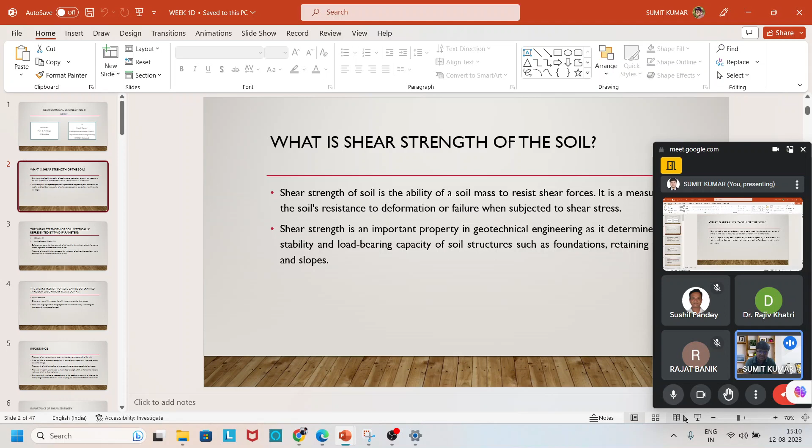Okay, so first of all, we started our discussion from here, in which we studied the shear strength of soil and the basic concepts we understood. Those things are covered there. So first we start from there and then go ahead with broader aspects of the concepts, which will enhance your knowledge base in this topic.

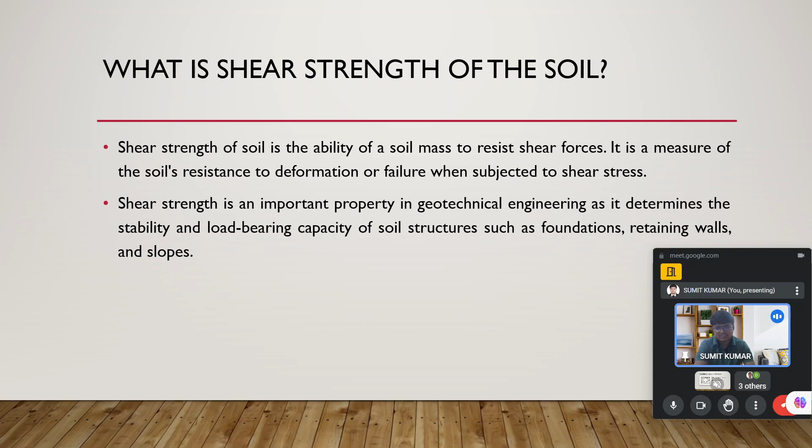First of all, we will define this. We have studied what is the shear strength of soil, and how shear strength is so important in geotechnical engineering, where we implement basic soil mechanics concepts into broader practical aspects. Most of these basics were studied during our geotechnical engineering one course, or soil mechanics one. So this is the second part of that subject, dealing with application of those concepts in practical life.

First of all, in shear, whenever we talk about shear strength, we start with the value of cohesion and the value of angle of internal friction. Cohesion is related to cohesive soil, while angle of internal friction is related to cohesionless soil like sandy soil, gravelly soil, and those have their own aspects. We are going very quick, not taking anything in detail. If any questions are there, you can pin a message in the text box.

Afterwards, we have read the triaxial test and direct shear test, covered in detail in the last lecture. In the coming week, we will again discuss the triaxial test and solve some problems, which will help with practical implementation. There are very good problems solved on this topic, and if you are a professional, these test results will help you find the shear strength parameters. If you are preparing for competitive exams, this is a favorite question topic.

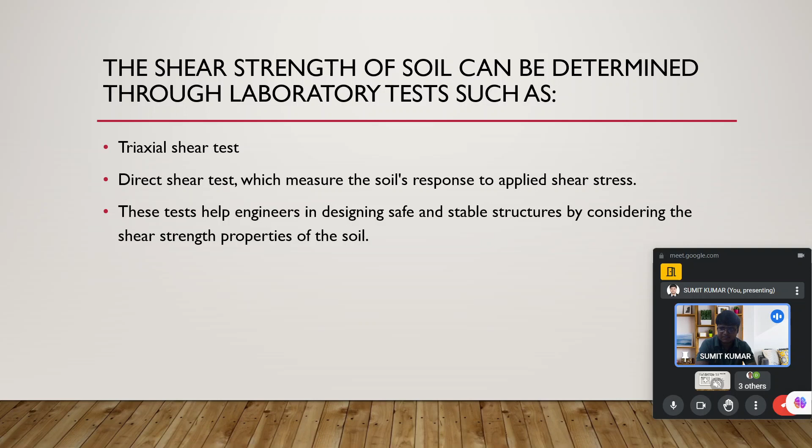Moving ahead, we have studied the importance of shear strength. It is used at every place in geotechnical engineering. In any geotechnical structure, first we understand what is shear strength and how it varies, and at what value the soil fails in shear criteria. In geotechnical engineering and soil mechanics, our focus is on the value of shear strength, not compressive strength or tensile strength as discussed in RCC, steel, or strength of materials classes.

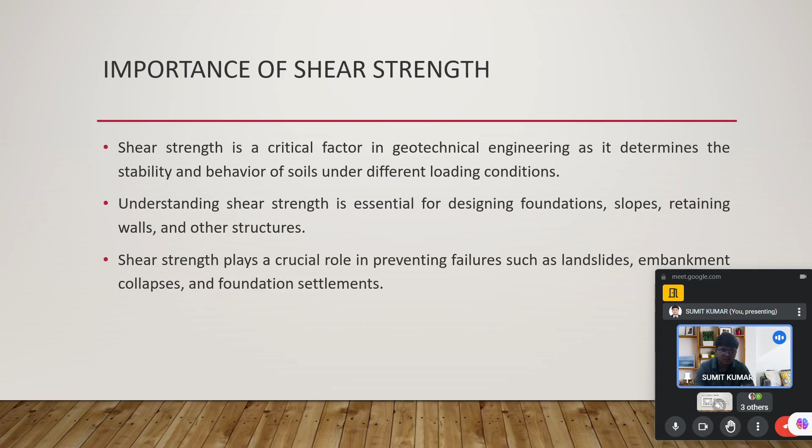So shear strength property in granular soil is due to particle-to-particle interaction, while in cohesive soil it is due to cohesion. The cohesion property of soil gives the shear strength, and it is the most important factor over there as well.

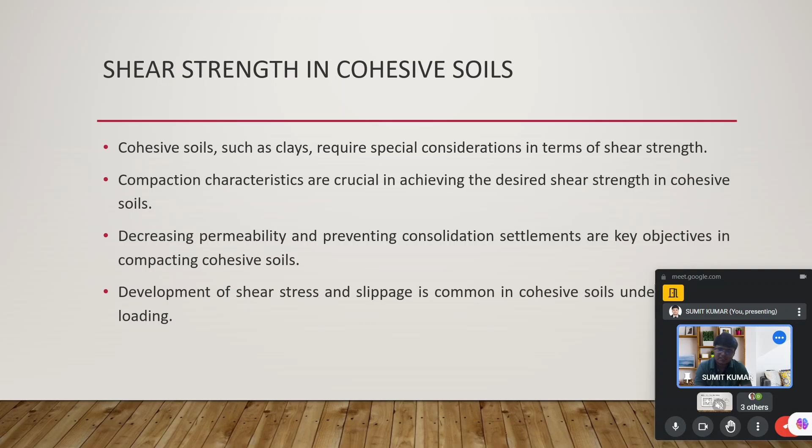Moving ahead, when we talk about loadings and shear failures, we relate the values of sigma x and sigma z to get the values of sigma and tau, the normal stress and shear stress at any other inclination from the given alignment. We will also try to convert how a three-dimensional load acting case translates into a two-dimensional study. We are taking the plane strain criteria so that it serves the purpose in geotechnical engineering, allowing us to solve complex geometry with more ease in practical implementation.

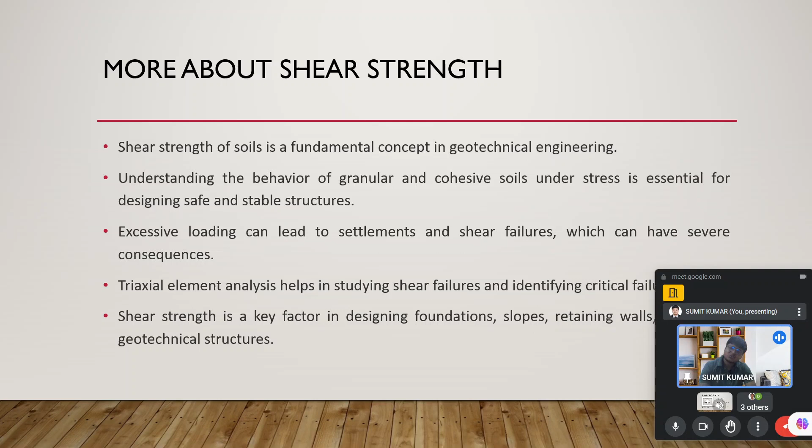So for the triaxial element, we will take a revision recap of these concepts in week two's revision session, which is coming ahead.

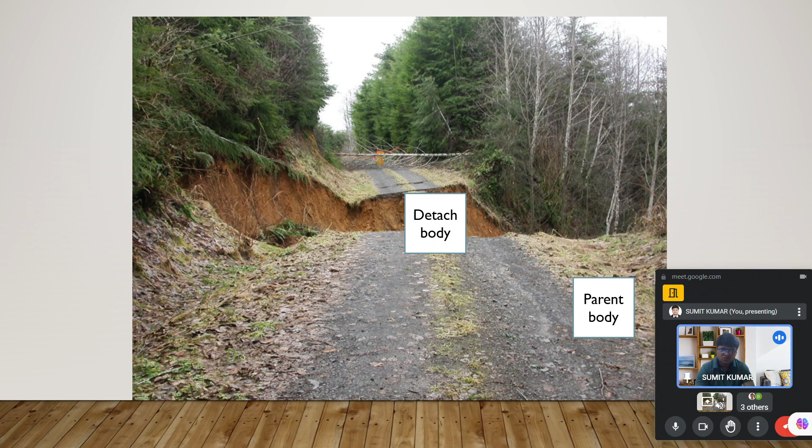Okay, so the triaxial state of stress. Basically, when we cut any section or consider soil below the ground, the stresses are acting from all three directions, not just two directions.

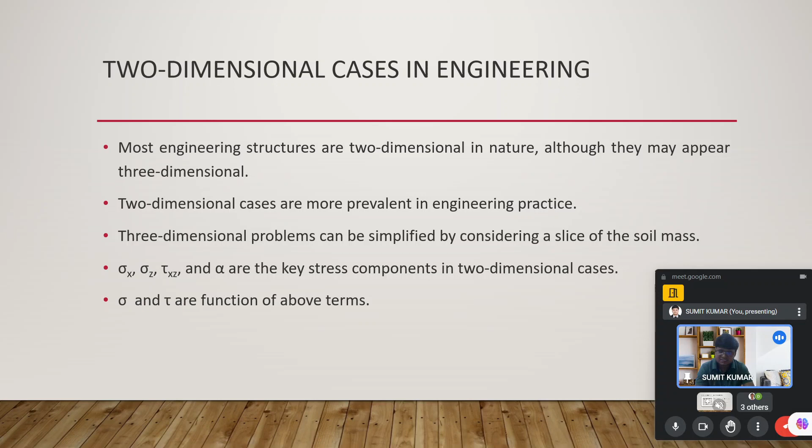When we calculate the value of sigma and tau, we use the relations for sigma x and sigma z, but we neglect the third dimension like sigma yz and sigma yx. That is because we consider the plane strain case over there, so we have neglected the stresses in the third dimension.

Now the conversion relation of tau and sigma is given here. We have solved so many problems on these topics, and I also gave you homework to solve more problems by taking different considerations. I hope you have gone through those, and that will help you to a certain extent as well.

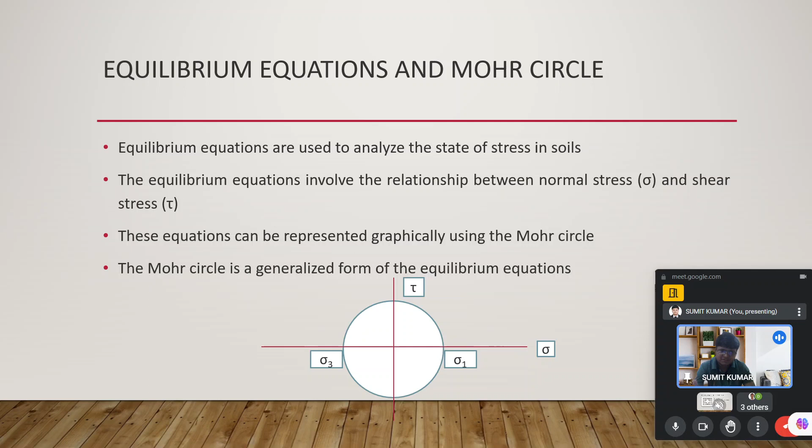So the basic concepts I give to you, so you will get revised. This is the most basic concept. In a subsequent slide, I will explain one of the figures so you will be more familiar with this concept about the Mohr circle - how the Mohr circle acts, what is the center of the Mohr circle, what is the radius of the Mohr circle, what is the value of principal stresses, what is the value of major and minor principal stresses, what is the value of normal stress on the shear plane, and what is the value of stresses, basically sigma and tau, at certain inclination in the Mohr circle.

There is a very good problem which was also solved during this course, and those presentations will be shared with you. I am just giving a revision to you for your convenience, so it will help you.

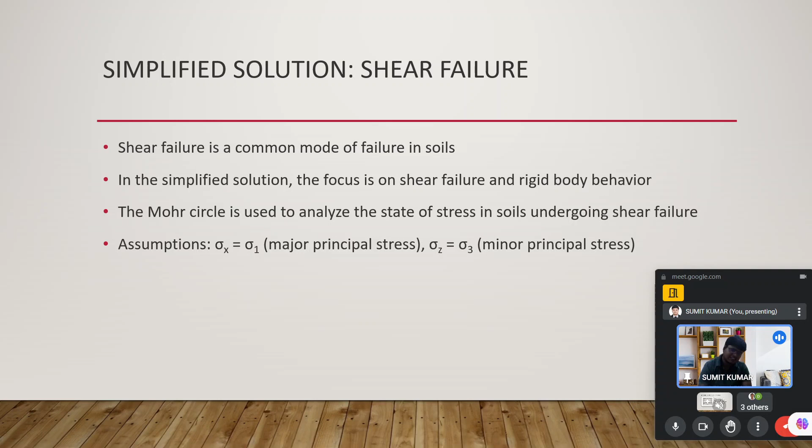And this is the sign convention, explained in a very fine manner, so you need to remember these concepts. And when we are talking about the major and minor principal stresses, if sigma x is there, you consider it as sigma one, whether it is major or minor principal stress, and similarly if sigma z is there, then it is sigma three. I think there is no point of confusion in this discussion.

So we are going ahead in our discussion. We have developed the general solution and the Mohr circle analysis. I will explain this Mohr circle analysis with this example. We have studied what is the value of the center of the Mohr circle - this is nothing but sigma 1 plus sigma 3 by 2, and 0 - and how it is happening is explained in the first lecture itself in a very detailed manner, but you need to understand as well as remember these points, because these are the most basic problems.

If you go for any exam, like engineering services or GATE, this question is specifically asked in engineering services - there are so many times questions asked related to strength of material as well as geotechnical engineering - and those get solved within less than 1 minute if you have the understanding of this graph. So how the question gets asked and how you will answer only depends on what concept you have. So please be confident with this graph and solve some more problems on this as well.

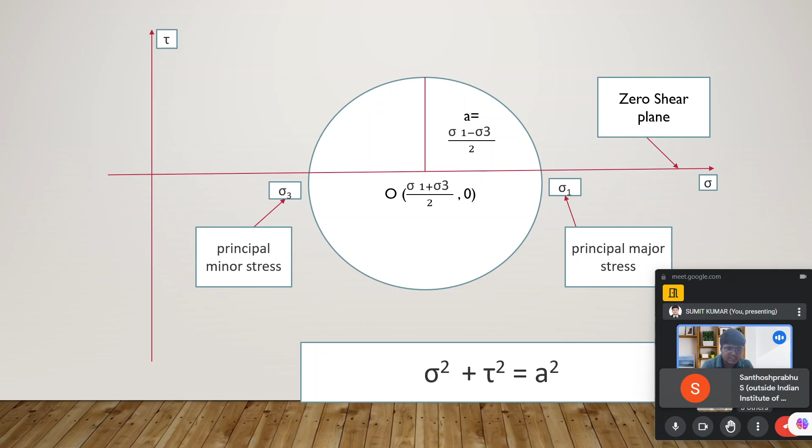So moving ahead, this is the relation to get the major and minor principal stress. I'm not going to discuss this in detail because this is only revision. Some of the problems are also there - this presentation is already shared with you, so please solve those problems and also consider some more problems. At the last, some homework is always given to you, so perform that homework. It's not compulsory from my side, but if you do that, you will get benefited in one way or the other.

Now we are talking about the application in civil engineering. Whenever we are reading any concepts, we first think, is it significant for us? So we think about what is the significance of studying this. Afterward we come to see, okay, it is significant, but where do we apply this concept? So those applications are equally important. Basically, anything we study must have some significance as well as application, otherwise there is no point to study anything. Knowledge never goes in vain, but we are trying to achieve something.

If we are reading any novel, we get to gather some good points from there as well, which will enhance our life and personality. So nothing goes in vain, but we should always think about the significance of whatever we are doing, whether it will be useful for us in some way or the other.

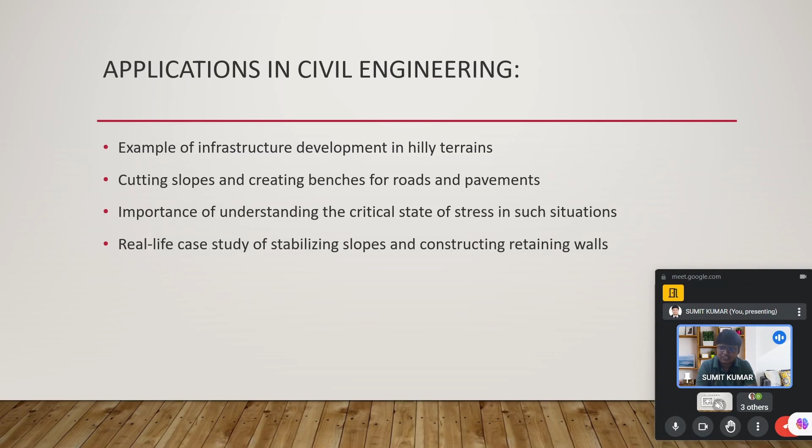Now, the active and passive state of material will be discussed later in detail. The pole is also a very important concept discussed in the first course. The pole is a point on the Mohr circle through which all the planes will pass. I think time is going ahead, so I will go a little faster to complete the revision, and afterward we will start a new session.

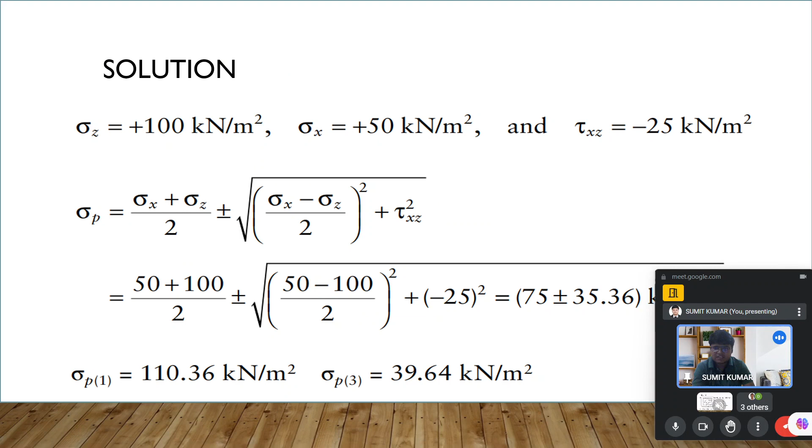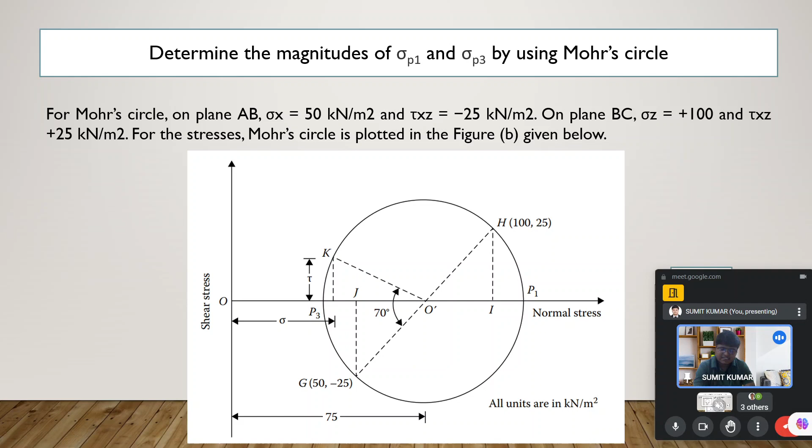The general state of stresses is also a very simple thing. We have solved some problems, and this is one of the very good problems solved by both the analytical method and the Mohr circle method. You must go through this. Whoever joined for the first time during this session and hasn't gone through my presentations or videos, please solve this problem. It's very important for understanding the Mohr circle and analytical method to solve stresses at some inclination from the original plane if stresses in the vertical and perpendicular directions are known.

And now we are coming to Mohr-Coulomb failure criteria. We will come back to where our first session ended, and take a quick revision of the second session. Afterward, we will start with the content we are interested in discussing today.

So now I am sharing the presentation for the second session to take a revision. Afterward, we will start with new content; in 10 minutes it will be over. This is for your convenience. Whoever is watching this video for the first time, either on YouTube, will also get benefited. That is my concern, and it will enhance your concept because double revision of the same concepts takes place, one after the other.

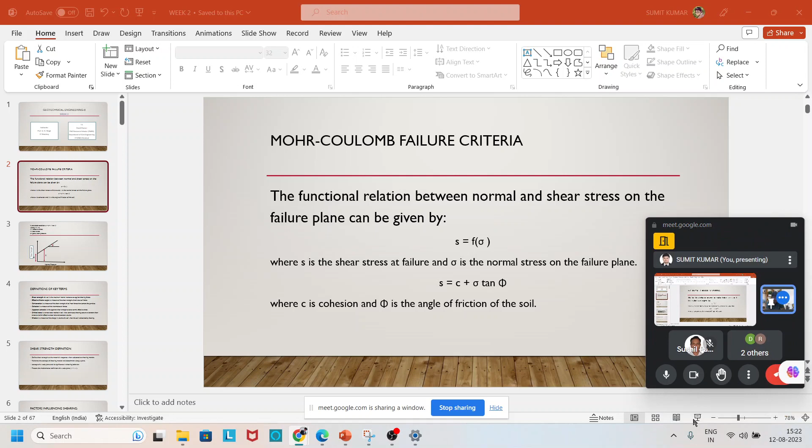So the Mohr-Coulomb failure criteria, this is the basic criteria. Basically, we are talking about the shear strength, which is a function of sigma, the effective stress or total stress. Earlier we talked about total stress. Afterward, we modified the Mohr-Coulomb theory to consider effective stress, because pore water is so problematic for civil engineers in geotechnical concepts—water is the biggest problem for us. It changes the effective stress to a great extent if the water table rises. So we should be very careful while designing and calculating the strength of any soil, because certain different types of failures take place in our day-to-day life due to this only.

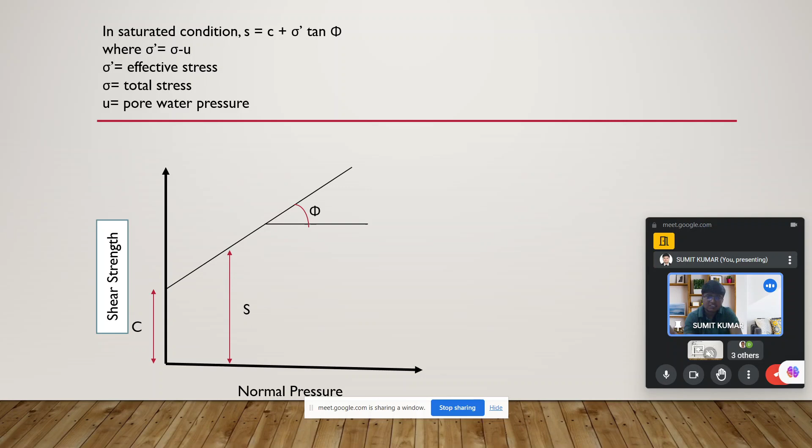This is the general relation, and this representation shows the angle of internal friction and how cohesion is known. There is a derivation coming in the subsequent slide, which was discussed during the last session. There are some definitions too, but I am not going through them again since they are basic concepts—you can revisit them from your topic notes.

Yeah, the mathematical definition of the weak plane—there is a weak plane concept. As I told you earlier in the first presentation, there is a parent body and a detached body, meaning the body gets detached from a certain place because of the weakest plane. Failure doesn't take place from just one point; specifically in a hilly region slope failure, the soil gets detached over larger extents, and this happens only because that is the critical plane where the strength is at its lowest level. Please understand this basic concept.

Now, the factors affecting the influence of shear—some major factors like earthquakes, slope instability, and construction activity also lead to the failure of soil in shearing. You need to understand these factors, and I had also given homework during the last session to those present in that interaction to write down those factors.

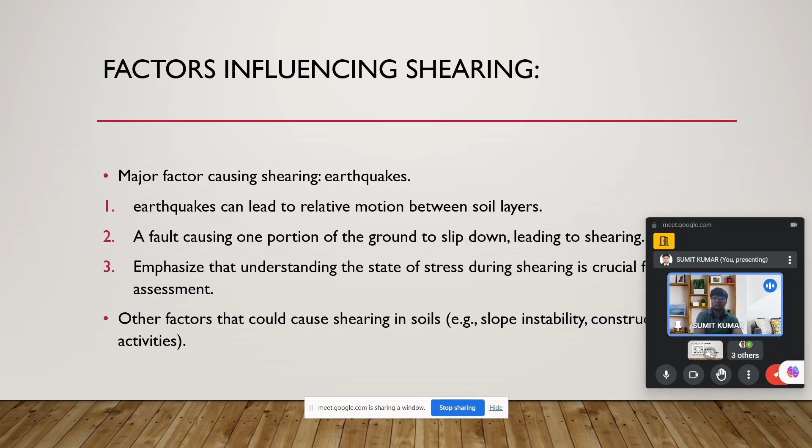So that will help you to understand the concepts. Now the application and significance, we are talking about the application and significance.

Earlier also I have told you that application and significance is one of the most important aspects. So in geotechnical engineering in day-to-day life, shear strength is the most significant thing, and it will have a major application in the construction of foundations, slopes, and retaining walls. So it has very good applications all over.

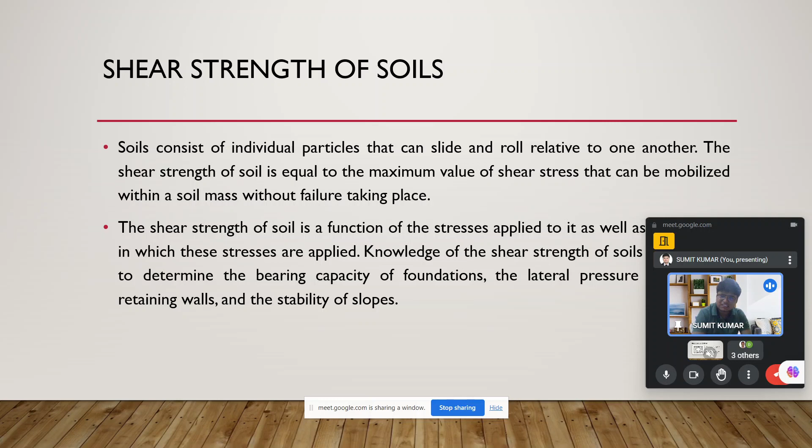Now we are talking about the shear strength of soil. We calculate the shear strength of soil by different techniques. There are different methods, like direct box method, triaxial method, and vane shear test.

So those we have discussed during this session, and I'm going very quickly for that. Basically, I'm running out of time, so I'll not take too much time to explain these points. But I think a little information will be shared, so that will help you in moving ahead with the new content.

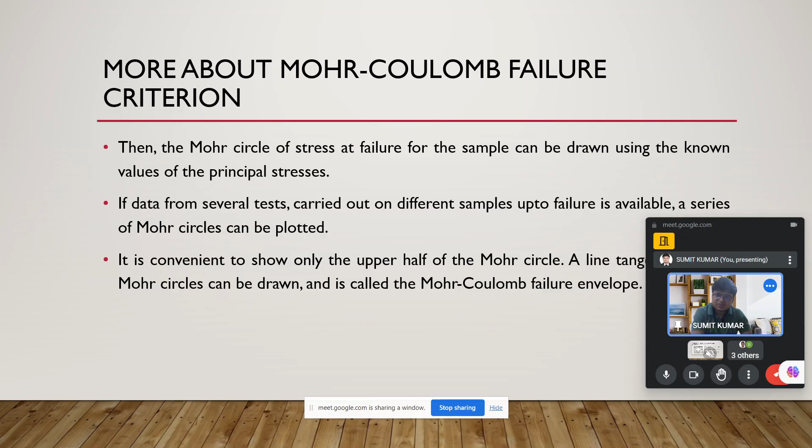Okay, so for the Mohr-Coulomb criteria you must go through the presentation. If you were not there in the last session, or even if you were there, you must go through that content, as it will enhance your concepts.

Okay, so now we have talked about the Mohr failure criteria in the last session, and we have talked about several tests, specifically the shear box test, triaxial test, vane test, tor-shear test, flat jack test, and the penetration test.

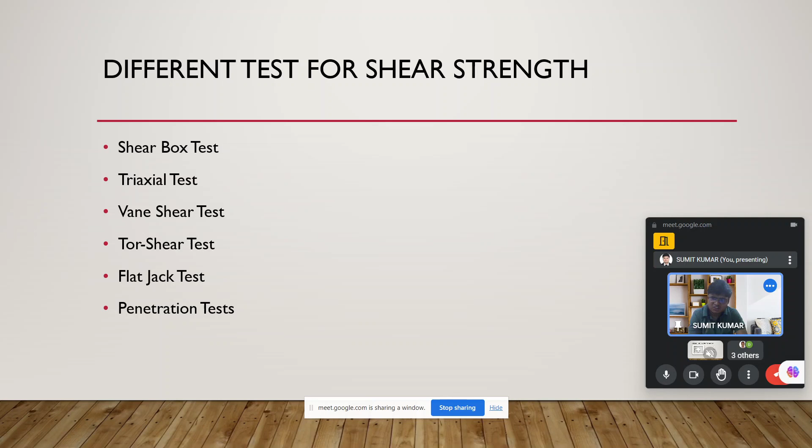During the last session, we studied how the shear box test happens and how the predefined plane is there. In the triaxial test, the 3D implementation, the actual implementation, is shown. We also talked about the vane test, tor-shear test, flat jack test, and penetration test.

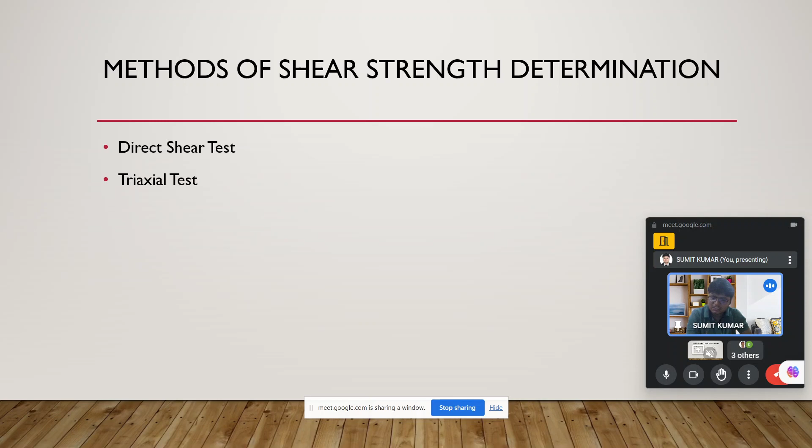Today, we are going to discuss the vane shear test in a little detail as well. So some input from the triaxial test, and some fundamentals related to geotechnical engineering like permeability and consolidation settlement, is also taken into account in the content which I have prepared for today's discussion, up to a certain extent.

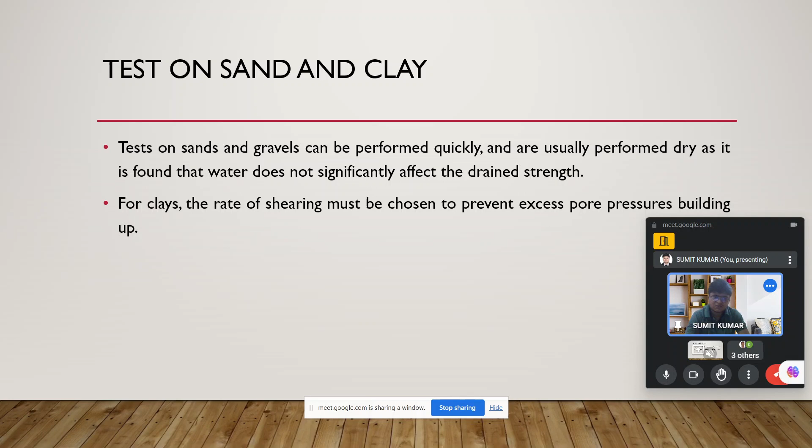What conditions should be there, what type of sand, what type of soil should be there for each test, is also mentioned, along with the procedure of the test. I am not going into those details due to the time constraint for today.

Okay, the advantages and disadvantages are also there — how it is advantageous and what are its disadvantages. One of the main disadvantages is that we already know the failure plane, from which section the soil gets failed.

So we don't get the critical point from which the soil actually gets failed if it is there at the site. This is one of the biggest disadvantages, and also there is no pore water pressure measurement in the direct shear test.

But when we go to the triaxial test, there are different UU, CU, and CD tests. So in those cases, pore water pressure measurement is possible, and we can get the effective stress and total stress parameters from those calculations.

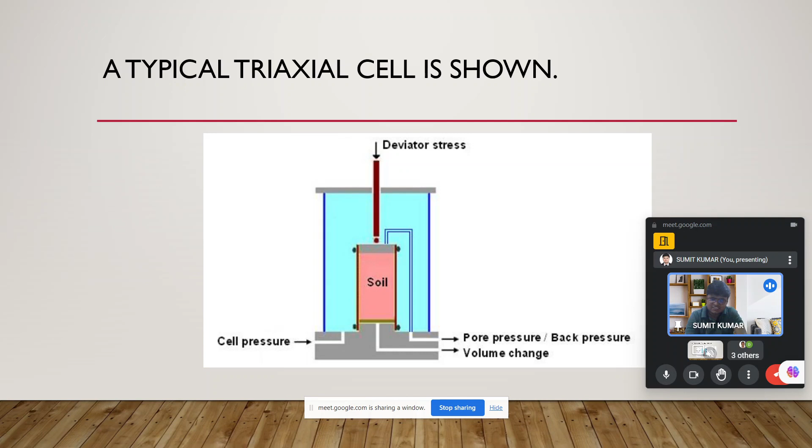So this is the triaxial test apparatus information, and this is the schematic diagram representing the triaxial test apparatus. The test procedure is also mentioned line by line, and it was discussed in detail during the last session. There are two stages there.

This is most important — during the first stage, the confining pressure is applied, and during the confining pressure, the pressure from all sections remains uniform and is mostly applied through water. We can use other lubricants or fluids as well, but in general we use water for application of the confining pressure.

In the second stage, the deviating stress is applied, based on sigma. When we talk about the confining pressure, it is normally sigma 3, which acts all around, while when we talk about the deviating stress, it acts from the top, and from this we can also form the Mohr-Coulomb failure envelope.

In that case, how does the Mohr-Coulomb failure envelope get created? We apply the value of sigma 3, then we apply the value of deviating stress, and the deviating stress is nothing but the normal stress, like sigma 1 minus sigma 3.

So for every sigma 3, suppose we applied the value of sigma 3 as 20 kilonewton, we get some value of sigma 1. Afterward we apply the value of sigma 3 as 21, we get another value of sigma 1, and subsequently the result gets processed.

On the basis of that, different circles are drawn, only from the top side of the XY axis, the tau-sigma plane. When we draw a common tangent to that, we get the failure envelope, below which no failure takes place, while above which, at certain points, failure takes place. That diagram is also discussed.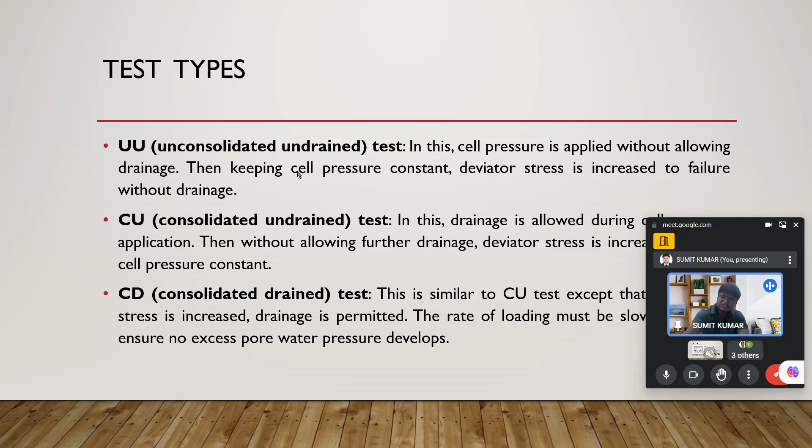Some more diagrams I will show you. The three types of tests discussed are the UU test, CU test, and CD test. These are some of the tests which are very important considerations in our aspects.

Moving ahead, what is the significance of this? How the pore water pressure could be calculated, that will help in our calculation. What is the advantage of this test over the direct shear test? Those points are also mentioned here, please go through that.

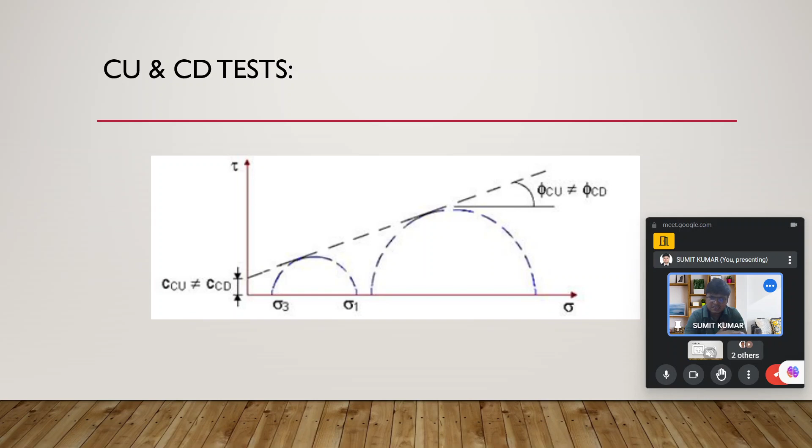The total stress parameter and the effective stress parameter, both tests are analyzed and elaborated here. From here, how we get the value of tau, C CU, and C CD. When the tangent value is parallel to the x-axis and when the tangent value is inclined at a certain angle is also discussed in great detail.

So I am not going with that. I will discuss these points again in a subsequent week because those topics are again coming in our consideration. I am not taking those aspects now, but last week I discussed them in a very detailed manner, so I am not taking time on that because I have some new content to discuss with you.

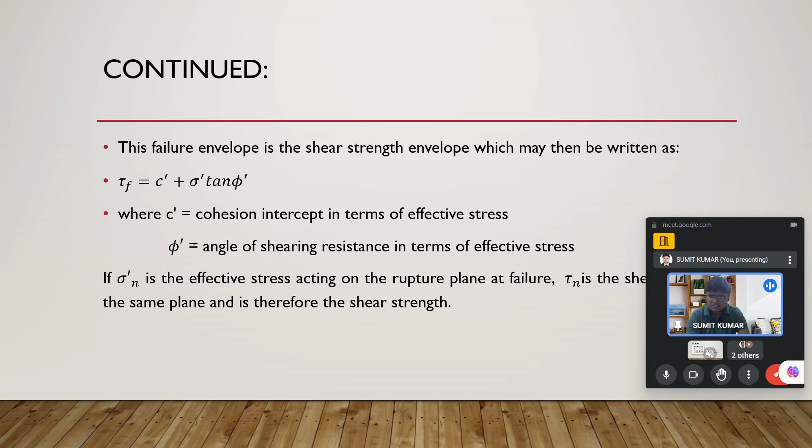These are some correlations relating the value of sigma 1 and sigma 3, and specifically parameters like friction and cohesion for the triaxial test. These are very important correlations from which we are also going to solve problems next week.

Now, during our last discussion we studied the Skempton parameters, like the value of A and B, because we are talking about the pore water pressure. We told that pore water pressure can be measured during the triaxial test, which is not happening during the direct shear test.

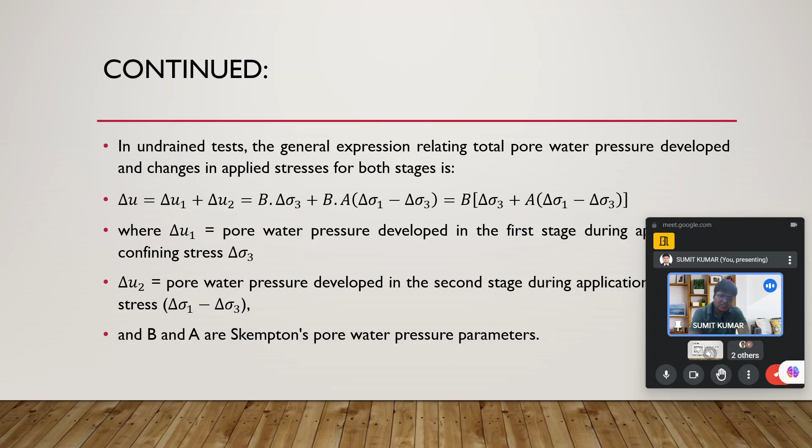So those discussions are there, how we calculate the total pore water pressures during the different tests, when the B value is 1 and when it is 0. During saturated conditions the value of B is 1, and during dry conditions it is 0. How the value of A varies is also covered there.

I think up to this only we discussed during the last session. We also talked about relative density. We said that if the relative density is more than 67%, the soil is dense, while if the relative density is less than 30%, it is loose. Based on relative density, we can relate these properties.

We talked about the void ratio for fine soil, but for coarser soil, relative density becomes the most important thing. We also relate it with dry density. So those aspects were covered during our last discussion, and we also solved some problems.

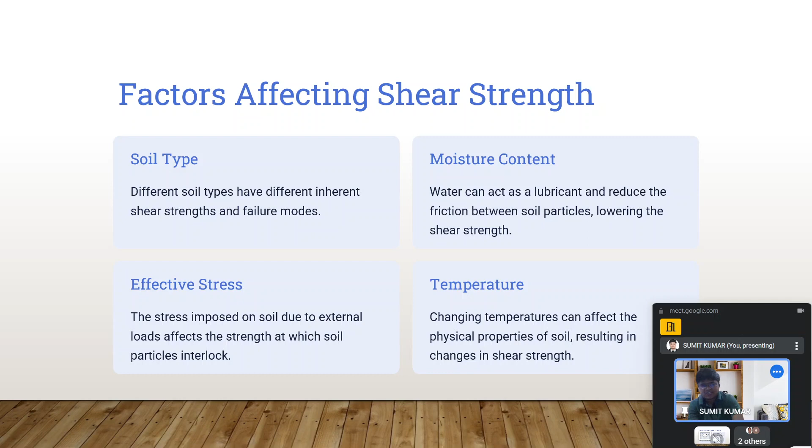Now we have different testing methods. We have discussed the direct shear test and the triaxial test during the last discussion. Direct shear test we discussed as a box test - how it is performed and what is the problem with it, like we are not able to calculate the pore water pressure. We also came across the triaxial test - how it is performed, what is the process, stage one and stage two. Stage one is the confining stage, and stage two is the deviatoric stage. How different conditions of allowing water to flow out or not will help us get the value of cohesion and friction angle. That is the aspect we covered during the triaxial test discussion in a very good manner.

So I will discuss this point of the field vane shear test, specifically how it is performed in our day-to-day life, how we get the value of shear with the help of the vane shear test, what are the correlations relating the value, and how we perform this test in the lab. Those steps also I will discuss up to an extent during this session.

In a field vane test, a handheld vane device is used to measure the torque required to rotate the blade in situ, which can be used to calculate the soil shear strength.

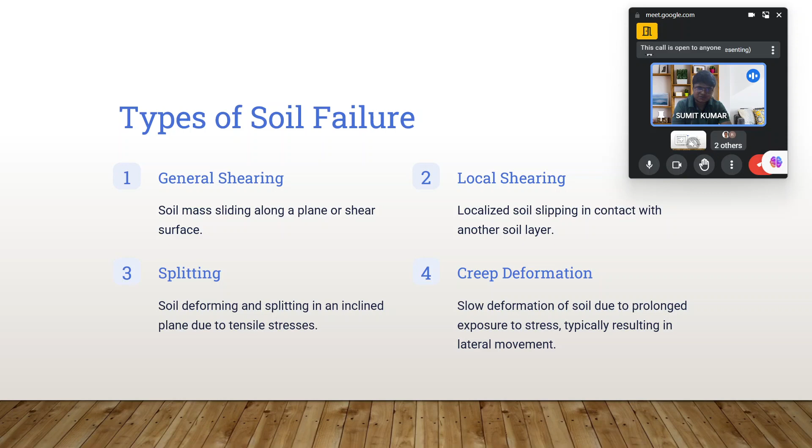Moving ahead, application of shear strength analysis. We have already studied several times that from foundation engineering, from foundation design only, shear strength becomes one of the greatest aspects. So if we want to design a stable and safe foundation for any superstructure, soil shear strength and stability is one of the most important criteria.

If we are taking the analysis of the risk of landslides, slope stability analysis becomes one of the most important factors, most important concern for civil engineers.

Similarly, earthquake is also a bigger problem, specifically in the last few months. You have seen so much rainfall, sometimes clouds burst and so much water flows like a river. Specifically in Himachal Pradesh, if any of you are from IIT Mandi, you have seen so much devastating effects take place in Mandi, which has good infrastructure, but due to so much rain this still took place.

When earthquakes happen, in India there are critical earthquake zones too. During earthquakes, a huge problem can arise if we don't consider shear strength to a greater extent. We don't understand how soil shear strength affects the behavior of soil during shaking, during dynamic loading when it comes onto the ground.

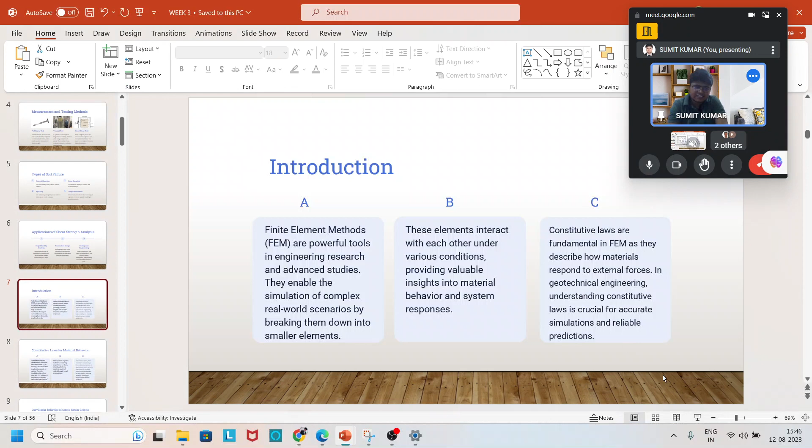So basically, deviating from some point - in finite element analysis of structures, we are mostly concerned about how the structure behaves during an earthquake. Because whenever we study earthquakes, we couldn't apply it manually - that would be expensive as well as time consuming. At some point, creation of physical models is quite difficult. So we perform finite element analysis, and there we study smaller elements, and these elements interact with each other under various conditions, providing valuable insight into the material.

We provide the conditions like what is the material there, what type of soil is there, what is the value of cohesion, what is the value of friction. That is given to the soil property and material property which we implement during the designing. We can also implement dynamic loads, wind loads, earthquake loads, run the analysis, and on the basis of the output we gather what strength or structure could sustain, and what changes are required. This will be helpful in simulating different problems and making predictions about behavior.

Now we talk about the constitutive law for material behavior. Constitutive law for material behavior creates the relation of stress and strain, either shear stress or shear strain, or total stress or total strain. There is a simple relationship relating stress with strain, like sigma equal to E into strain, where E represents the elastic modulus of material. This equation signifies that stress is directly proportional to strain, reflecting the linear behavior of material under small deformation.

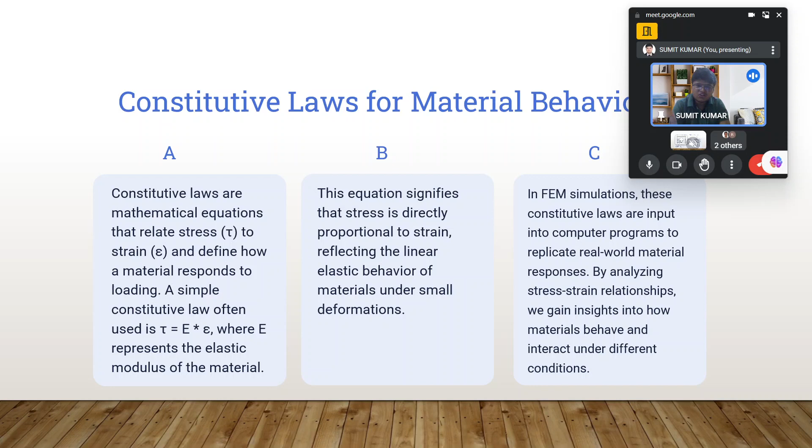Now, when we talk about the behavior of the stress-strain graph, there is a curvilinear behavior seen, and there is one graph also discussed during our last discussion. The variation of stresses and variation of void ratio is shown for dense soil as well as loose soil. So when a material experiences larger deformation or higher stress, their behavior becomes more complex. The stress-strain relation deviates from linear behavior, resulting in curvilinear graphs.

The concept of failure envelope emerges, represented like tau equal to A into sigma by B, where tau is the shear stress and sigma is the normal stress, and A and B are the material constants. These are the interrelations which could be developed with the help of analysis.

The constants vary based on the analysis types, total stress or effective stress analysis. We have studied total stress and effective stress analysis during the last session, and during the revision session of week 2 I also represented the effective stress parameter and the total stress parameter. Those understandings are equally important to understand the broader aspects during our analysis, either physical model test or finite element model test.

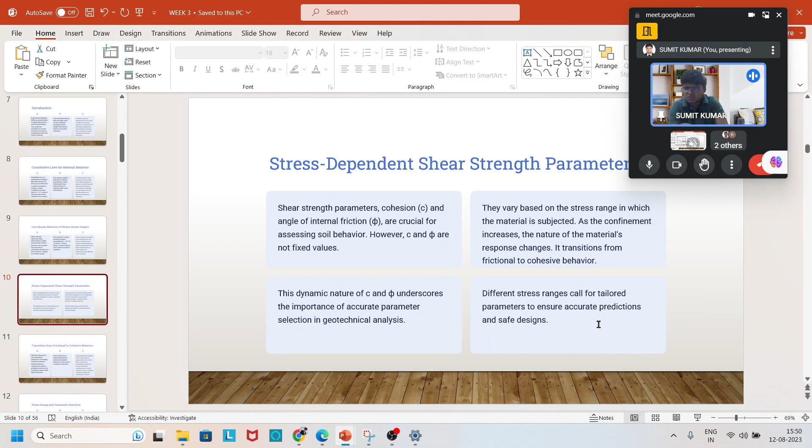Now, stress dependent shear strength parameter. What are the stress dependent shear strength parameters? We also need to understand this. First of all, the two shear strength parameters are cohesion and the value of friction, internal friction. These are most crucial because from the first lecture, from the first two or three slides only, we talked about cohesion and friction angle. So it is the most important aspect when we talk about stress dependent shear strength parameter.

They vary based on the stress range and the material subjected to, on which type of material they are subjected. Like if we talk about the strength of material, the material is hard, it also has elasticity, so the behavior is different. But when we talk about soil, the nature of the material changes, so its response also changes based on those aspects.

So the transition from frictional to cohesion behavior is also one of the things. And the dynamic nature of soil, like when dynamic forces act, we have studied during earthquakes what conditions could arise which affect the study, and the different stress ranges call for tailored parameters to ensure accurate predictions and safety. Now, transition from frictional to cohesion behavior.

Earlier I mentioned that the transition could take place, but how this transition took place, some points are mentioned here. I will read and elaborate as well. The material subjected to increasing stress experiences a fascinating transition in behavior. Initially the frictional response dominates, and the material gradually transforms into cohesive material under higher confinement.

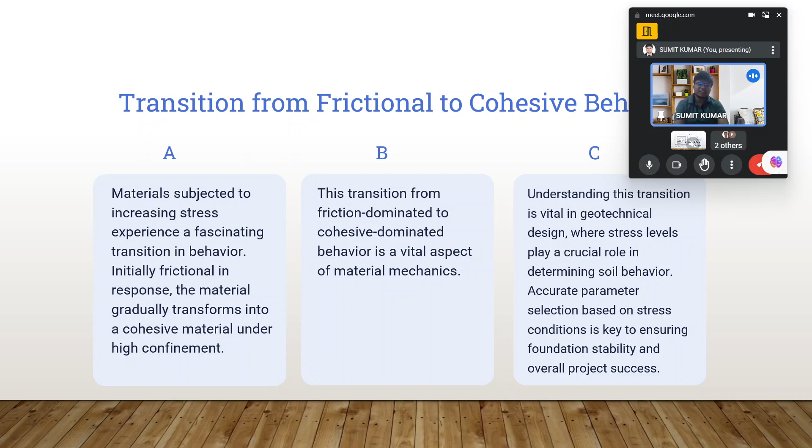So understand this transition is vital in geotechnical design, where the stress level plays a crucial role in determining soil behavior. Accurate parameter selection based on stress conditions is key to ensuring foundation stability and overall project success. I think this will be clear, I will move ahead.

Stress range parameters - some more points related to this. Selecting the appropriate shear strength parameter involves considering the stress range of the project. Different projects have varying stress regimes. For example, embankments and foundations experience different stress levels compared to shallow slopes. This is because embankments and foundations sustain heavy loads, either from soil or water, while slopes experience different types of loads at different heights. So matching parameters to the stress range ensures reliable analysis and safe designs.

When we talk about geomechanics, it is the study of soil behavior under different conditions, guiding parameter selection. This discipline allows engineers to adapt to the changing behavior of material under varying stress scenarios. So this becomes very important.

Now the crushing and particle behavior. At high stress levels, the granular material undergoes particle crushing. If we increase the stress to a larger extent, crushing of the particles must take place. This is one aspect we need to understand - how much confinement we are going to give if we are trying to convert from one state to another.

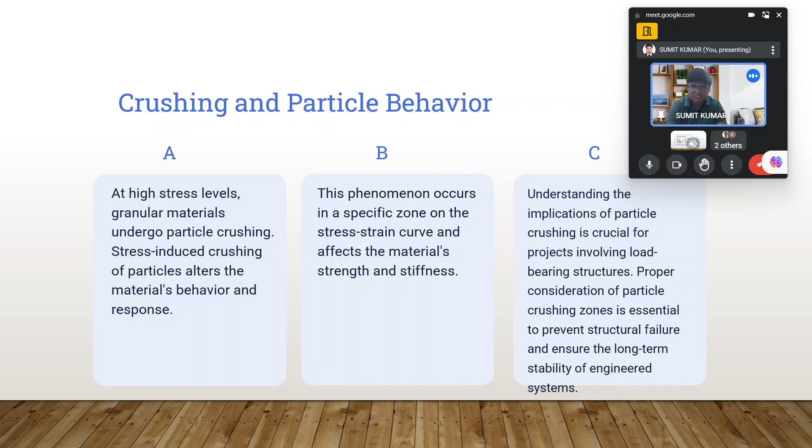Now we talk about material attributes and geomechanics. Material behavior is influenced by a multitude of attributes, including mineralogy, angularity, sphericity, density, and crushing strength. These attributes collectively define how the material will respond to stress and deformation, and the complexity arises from the interaction of these attributes. When these attributes correlate with each other, the different aspects will provide different results and ultimately give understanding of the actual process going on.

Now, material testing is necessary to assess material behavior under specific stress conditions. The diversity of material attributes requires engineers to tailor the analysis and design approaches to each unique project. Everything is unique for each project - it will vary, it will be independent in a way.

Material testing and its application is also important whenever we are going to do analysis. Material testing is a critical step before utilizing material in engineering projects. Whenever we do any analysis, we first see the soil - over here the material is soil. So we must perform some tests there.

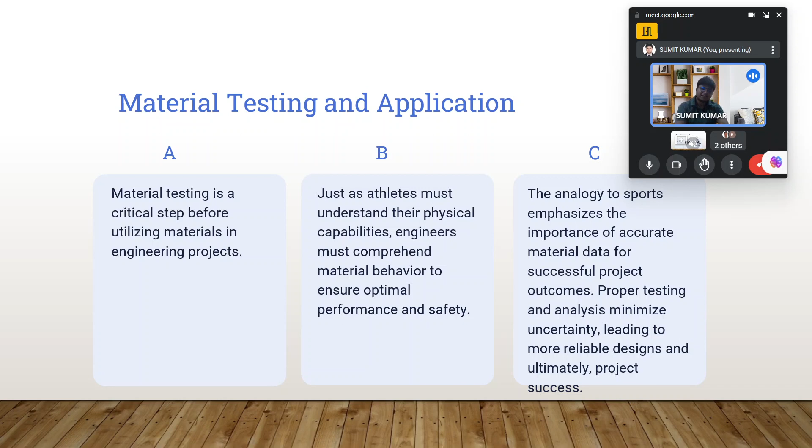Just to talk about a real life example, like if any athlete is going, first of all in cricket you must know about the yo-yo test. There, the cricketers, if they don't pass the yo-yo test, they are not qualified to be there in the selection, available for selection. So just like understanding an athlete's physical capability, in the same manner we understand the capability of soil - how much load, how much strength, and how safety will be provided by it during the application of load. This is similar to the analogy of sports when we go for testing the material.

Okay, now composite material and future consideration. Over there, first of all, we conclude this session and conclude this section.

After that, we go for two tests, like the Vane shear test and the tri-axial test. We will take some important aspects, fundamentals of geotechnical engineering, and afterward we will see the aspects of the Vane shear test - how it will be performed, how we get the results, how we get the factor of safety, and the settlement correlations are also there.

So, composite material and future considerations - when we talk about the realm of geotechnical engineering, there is a growing interest in composite materials. Whenever you look at researchers, composite materials are becoming very important these days. By combining different materials, engineers can create composites with desired properties, and composite materials allow for innovative solutions and can better address the challenges posed by complex projects and dynamic material design. The future of geotechnical engineering involves pushing the boundaries of material science to develop innovative solutions that improve the sustainability, safety, and efficiency of construction and infrastructure projects. This needs to be understood by us geotechnical and civil engineers.

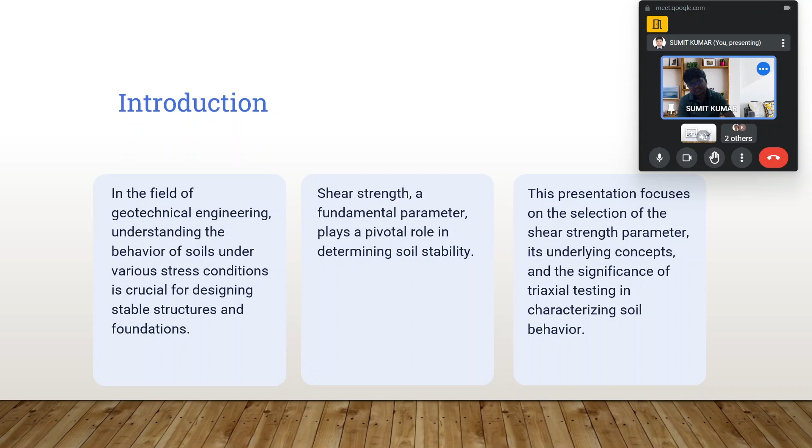Shear strength is one of the fundamental parameters. During this presentation, we will focus on the selection of shear strength parameters, which underline the concepts and significance of triaxial testing, characterization, and soil behavior. Now I will discuss some of the points one by one, which I have elaborated for you.

During your revision, if you go through these slides, the content is so organized that you will easily remember it, and I think you will find the aspects very interesting. So first of all, shear strength and strain behavior - first of all we talk about initial behavior.

Imagine a spherical particle under compression. Initially, it tolerates the stress within the elastic range. After that, breakage and crushing takes place at a certain point. If you apply stress at any point, like in strength of materials we talk about steel, on that also we apply tensile stress - after a certain extent it will bend, necking will occur, and a fracture point is also there after that.

Similarly, if we consider a spherical particle and apply a compressive force, up to an extent it has strength and will tolerate getting compacted, but beyond a certain point, breakage and crushing can occur, leading to changes in particle shape and sphericity. This will ultimately lead to a change in the physical property.

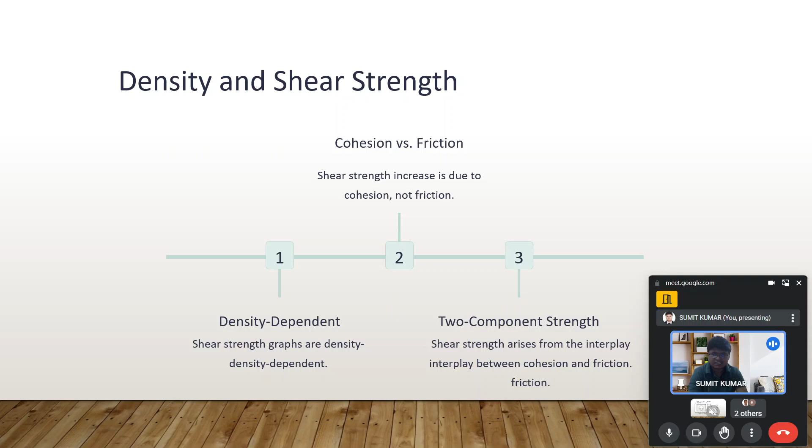Now we talk about the variability in soil behavior, how soil behavior varies. If we talk about sand and clay, and then consider the aspects of cohesion and friction, those go hand in hand, but let me explain this point. In general, soil exhibits varying behavior under different stress conditions. When we talk about cohesion and friction, it is not limited to a specific type, like sand only showing friction while clay only showing cohesion. So this point needs to be understood.

If it is a completely clay soil, cohesion is the prime aspect we consider to calculate the shear strength at those sites. Similarly, if friction is predominant, friction takes command. So that needs to be understood.

Now the triaxial testing and the stress states. We know we have studied the direct shear test and triaxial test, and during the triaxial test we also relate the values of sigma 1 and sigma 3 with C and phi. So those aspects we first go across.

In direct shear test, soil response and characterization takes place. We already know the soil is going to fail from a certain plane, and pore water pressure dissipation could not be calculated, but we perform the test to get the value of strength, and it depends on where we are performing the test, what type of soil is there, and what important structure we are going to construct based on those results. We could use different types of boxes for the test. So that is one of the aspects.

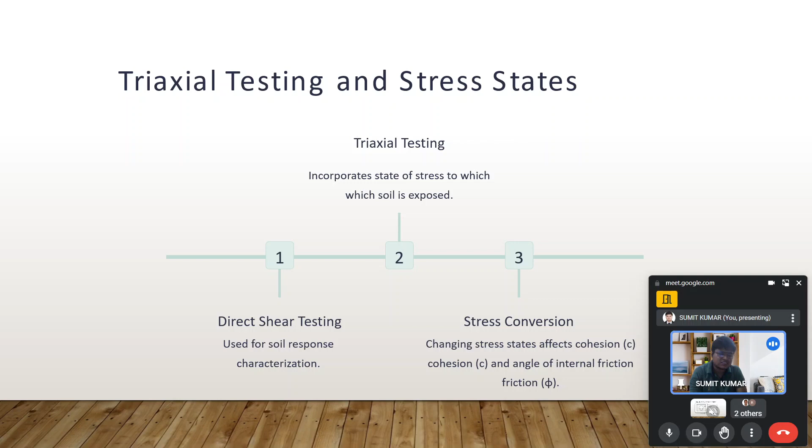We can relate this with the simple triaxial test equation: sigma 1 equals sigma 3 tan squared of (45 plus phi by 2) plus 2c tan (45 plus phi by 2). Over there, you could observe that if the value of C and phi got changed, sigma 1 and sigma 3 also get affected. The converse is also true, meaning variations in sigma 1 and sigma 3 in different proportions lead to changes in the value of the shear strength parameters like C and phi.

Similarly, now let's talk about texture, friction, and cohesion, and their effects in soil. In fine grain soil and coarse grain soil there are two aspects. In fine grain soil, texture is governed by the pore structure and influences cohesion, specifically when talking about clay or maybe silt to some extent. But when talking about coarse grain soil, particle properties like shape, size, and specific gravity determine the behavior, because in those cases the particles slide one over another and friction acts between them.

So that, in a way, is providing the shear strength to a certain extent. Now, the time dependent deformation is also important.

In geotechnical engineering, we are more inclined toward consolidation settlement. You must have studied consolidation during soil mechanics or geotechnical engineering one, where we calculate the consolidation settlement. There you find the value of CV, coefficient of consolidation, MV, coefficient of volume compression, and other parameters like compression index and recompression index. So from there you find the value of settlement - if a specific section of soil is there, what the settlement would be, and how we calculate the consolidation settlement.

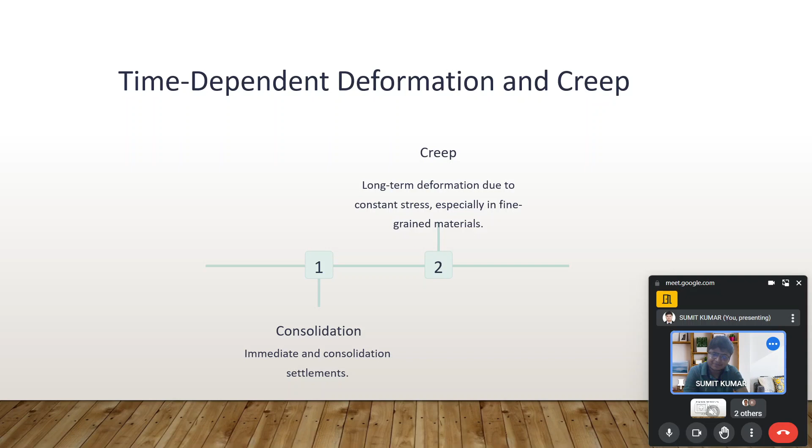Now, triaxial testing: plane strain versus three-dimensional strain. This is one of the points you need to understand, and understanding why this is needed is also one of the important aspects.

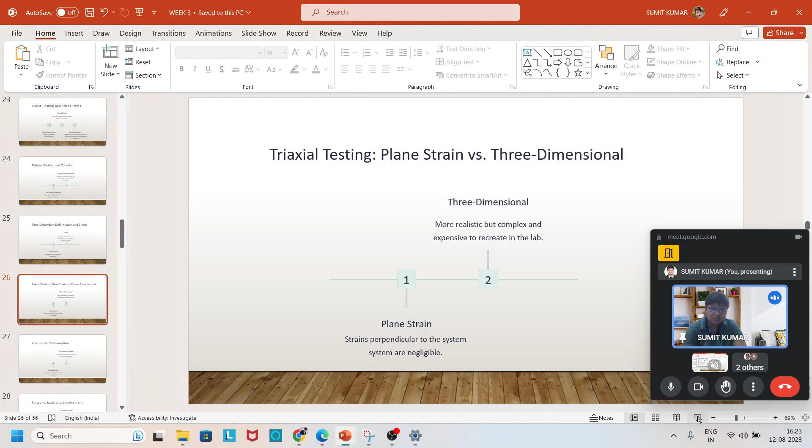So first, triaxial testing - plane strain versus three-dimensional strain. In plane strain, the strain perpendicular to the system is negligible; basically in the third dimension we neglect the strain. If we are talking about plane strain, the strain in x and y direction is taken into account, and strain associated with the other direction is neglected. Similarly, if we talk about stress during the plane strain case, the stress in the third direction - say x and y are the directions we're considering - we neglect strain in the z direction, but stress in the z direction must still be there.

When we consider plane strain, some examples are retaining walls and dams, where the third dimension is very large - these are plane strain cases. Another example is water flowing in a pipe. These are some examples of plane strain.

But when we talk about three-dimensional, it is more realistic but complex and expensive to recreate in the lab - we know three-dimensional testing is expensive as well. But in our triaxial test, we also relate sigma 1 and sigma 3.

We say that sigma 2 and sigma 3 are the same, but we are implementing this in the practical life only because the stresses acting all around are almost same, so it resembles the true state of stress at the site that we are dealing with.

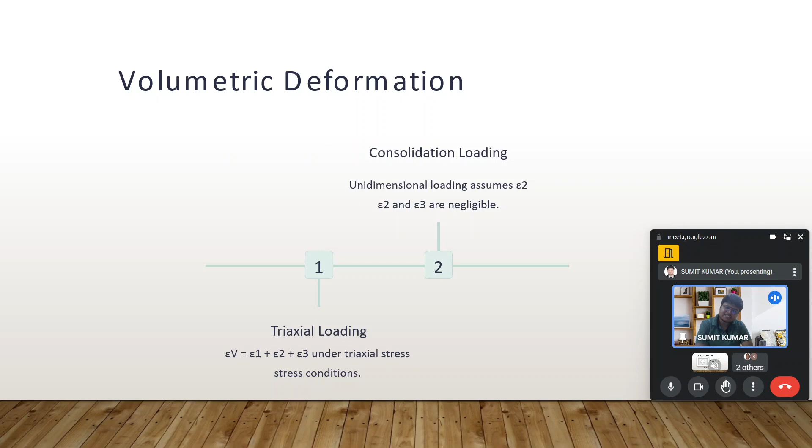Now the volumetric deformation. When we talk about volumetric deformation, consider triaxial loading versus consolidation loading. During consolidation loading, the unidimensional loading assumes epsilon 2 and epsilon 3 are negligible, while in triaxial loading, triaxial stress conditions are present.

It will be very... sorry. Okay, allow me to take some water. Okay, now we will proceed ahead.

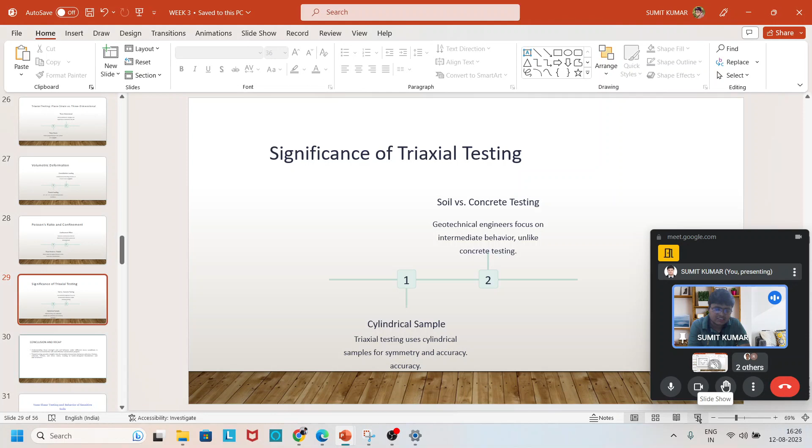So over here, what we are talking about is the significance of triaxial testing. Why are we so concerned about triaxial testing? The cylindrical samples are there, and if we go below, we see that the triaxial test resembles the actual condition that exists inside the soil.

So triaxial testing uses cylindrical samples and symmetry occurs about the center of those cylinders, and by providing the confining pressure, accuracy gets enhanced.

And when we talk about soil versus concrete testing, geotechnical engineers focus on the intermediate behavior, unlike concrete testing. In concrete testing, when failure takes place, we say this is the given value.

But in geotechnical engineering, specifically anytime we talk about cases like consolidation or permeability, we believe in what will take place with time, not a sudden result. So it is a time-taking process. If we take the example of the triaxial test, when we perform the different tests like UU, CU and CD, the different tests take different times to get the result. So that needs to be understood by all of you.

Now, up to this section, I will conclude the fundamentals of geotechnical engineering and soil mechanics. I am concluding over here. After that, the vane shear test is one of the aspects we will go into, and up to that we will proceed in our sessions.

We will also show you some of the interrelations and some more work. I will suggest at the end that if you go and perform this at your home, you will get benefited and you will get better results.

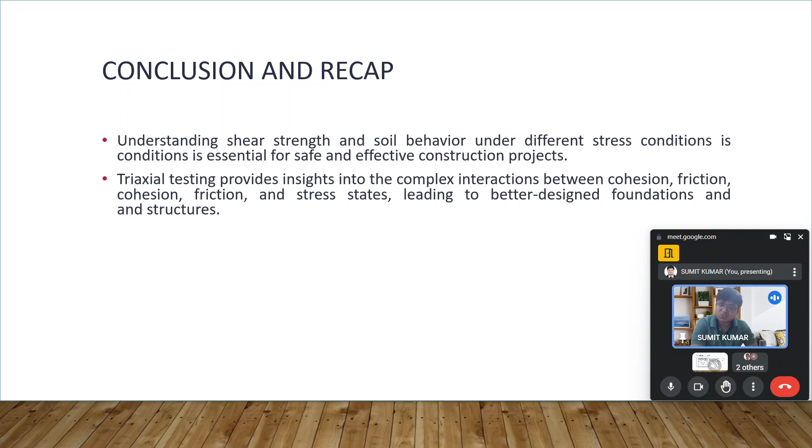And with this, before starting this, I will tell you that please perform this vane shear test at your respective institutes, or if it is possible, if any one of you is a working professional and doesn't have access to a lab, please see the demonstration of this test on YouTube.

NPTEL is one of the channels, that is the Government of India channel, NPTEL. Over there you will find so much important test footage, which will give you a good perspective, and those tests are performed in a very good manner, in a real manner. So you will understand those things as well.

If you don't have access to a laboratory... and if any one of you, or all of you, have access to a laboratory, please perform it in the lab itself. So it will give you a better idea.

Okay, so first of all, the vane shear test is a valuable method in assessing the shear strength of sensitive soil, striking.

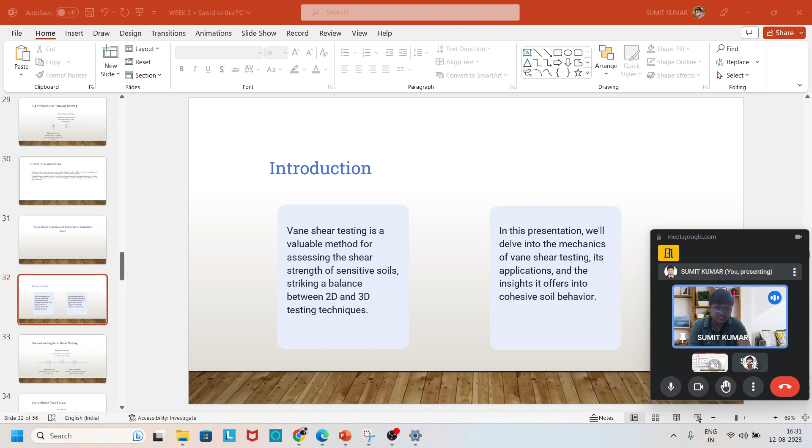The vane shear test is a valuable method for assessing the shear strength of sensitive soil, striking a balance between the 2D and 3D testing techniques. Basically, it performs a balance between the 2D and 3D techniques.

In this presentation, we are going to cover the mechanics of vane testing, its application, and the insights it offers into cohesive soil behavior, and how it performs on cohesive soil. There are two types: one where we insert the vane inside the soil, and another where the top is kept at top of the soil. There are also two correlations, but in this presentation I think I have mentioned only one. The other will be mentioned during the next class, or maybe during uploading I will upload both correlations so you can go across that. So first of all, let's understand the vane test.

What is the vane test and how is it performed? The vane test is a method to measure shear strength. It is one of the methods, like the direct shear test and the triaxial test, by which we are able to calculate the value of shear strength. It provides a balance between 2D and 3D, a middle ground between plane strain and triaxial testing, an intermediate between those. In triaxial testing, we get the actual 3D condition, while in 2D testing, plane strain, a middle ground is observed.

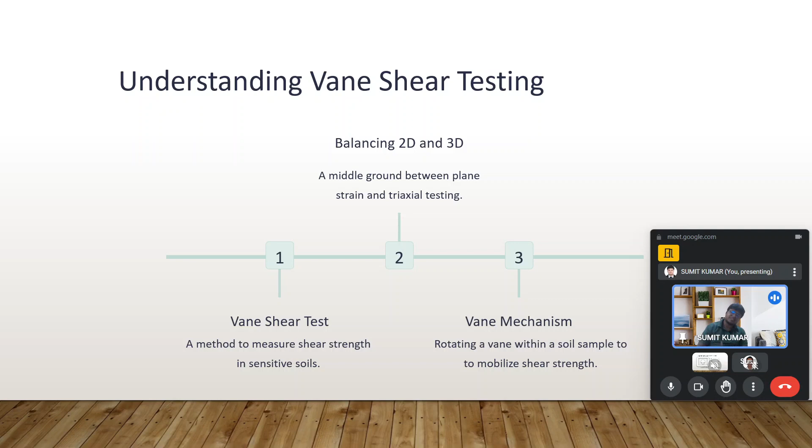In the vane mechanism, we rotate a vane within the soil sample to mobilize the shear strength. We read the procedure step by step—every point is there, but first you should understand the basic aspects. Then we will go step by step through the test, so we get a better understanding of the topic.

First of all, let's talk about the setup. What is the setup? In the setup, the casing and sampler are there. The casing is inserted into the soil. It is normally used for soft and sensitive samples during testing, because if the soil is not soft, we couldn't rotate it. First we have to insert it into the soil, then we have to rotate it and provide the torque.

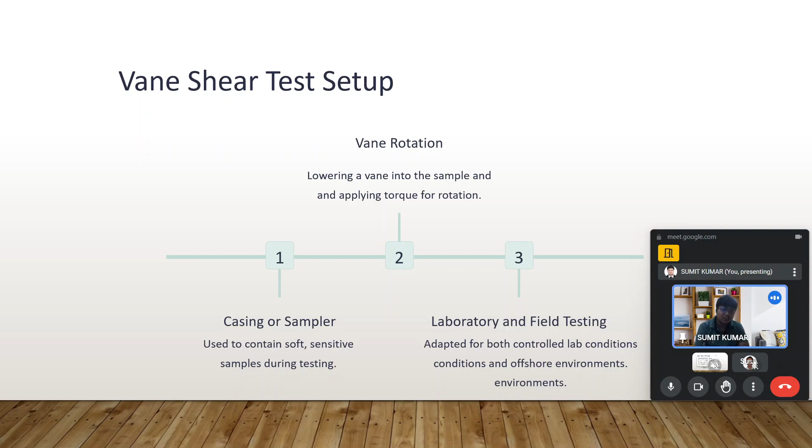In vane rotation, we lower a vane into the sample, as I told you, and apply torque for rotation. This is both a laboratory and field test, adapted for controlled lab conditions as well as offshore environments. For offshore environments as well, we are able to perform this test.

Now, the torque application: in torque application, we rotate the vane around its axis.

Around its axis, it gets rotated, and the torque is applied by that mechanism. In that case, cohesion mobilization takes place, vertically and horizontally. The mobilization of cohesion takes place in the soil, and some patterns must get developed like vertical, horizontal, or, if it is inserted in the soil, some end bearing analogy will also be there.

When we talk about the vertical plane, the cohesion is mobilized vertically due to the vane rotation, because it is rotated about its axis. This takes place due to the vane rotation, and this condition is seen when the vane blade gets rotated.

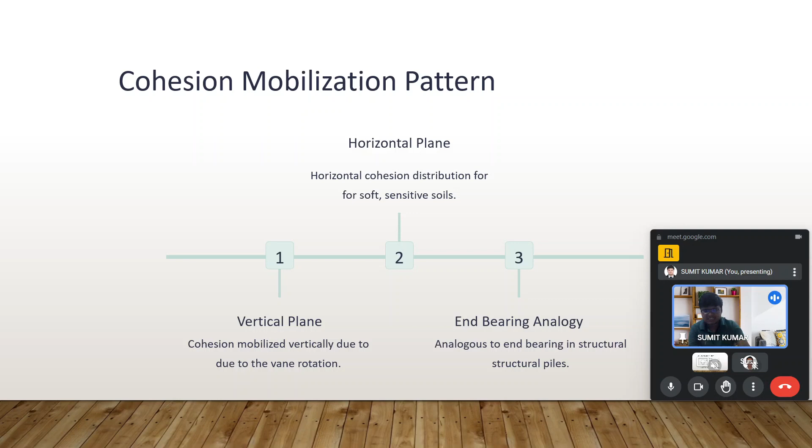Now, solving the vane shear test. We are performing the vane shear test to reach a certain result. Our main focus is to understand this vane shear test and to obtain the result that will be utilized by us in our discussion.

In order to find the value of shear strength, with the help of that we are able to find the value of factor of safety, in a similar manner as we discussed with the concept of the weakest plane. If we get the value of shear strength, the applied stress is also known, and strength divided by stress gives the factor of safety, which ultimately helps us find those values.

With the help of this test, we are also able to find the sensitivity of soil, which is defined as UCS undisturbed, meaning the unconfined compressive strength of undisturbed sample by the remolded sample. We will look into that as well in the coming slides.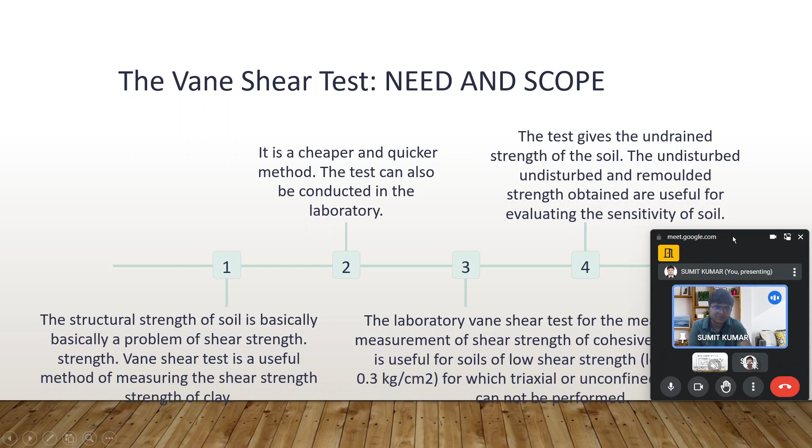So first of all, when we talk about the vane shear test, I will again explore and elaborate on those points: what is the need for this test, and what are the scopes that get elaborated and enhanced with the help of this test.

The structural strength of soil is basically a problem for the shear strength. The vane shear test is a useful method for measuring the shear strength of clay, and it is a cheaper, quicker method. It can take very less time to calculate the strength, unlike the triaxial test, so it is helpful in that way.

When we talk about laboratory vane shear test measurement, it is useful for measuring the shear strength of cohesive soil of low shear strength, less than 0.3 kg per cm square, for which the triaxial or unconfined test cannot be performed. So this test serves the purpose of calculating shear strength, where we primarily use direct shear or triaxial test, but the vane shear test also serves the purpose where those tests are not sufficient to give the desired result.

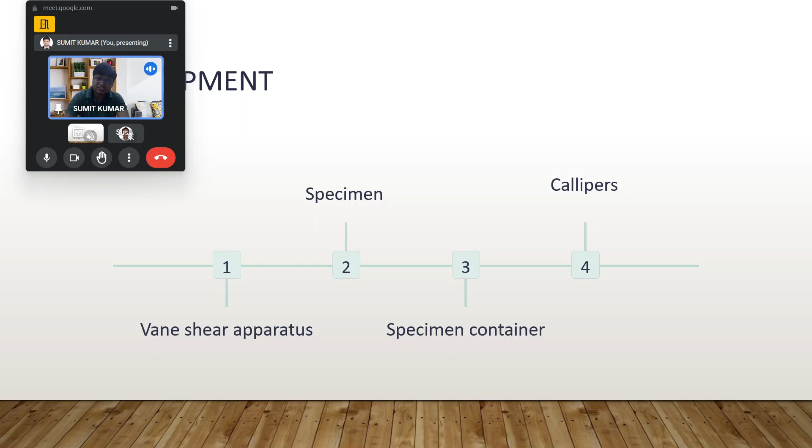We couldn't find the result there due to site constraints or maybe some other reason. So this test gives the undrained strength of soil, and the undisturbed and remolded strength are often useful for evaluating the sensitivity of soil, for which you will see the correlations as I specified. Some of the equipment which we use during this test is also one of the aspects.

So, what are the equipment we are using during this test? That's one of the aspects. The equipment are the vane shear apparatus, soil specimen, specimen container, and the callipers.

And in this test, I think audio and video will be clear for everyone.

Okay, so in this test there will be an experimental procedure. I will explain the experimental procedure one by one for you, it will help you. First of all, we prepare 2 or 3 specimens of the soil sample, at least 37.5 mm diameter and 75 mm length.

Basically, we try to keep the L by D ratio as 2 or 3, and mount the specimen container with the specimen on the base of the vane shear apparatus. If the specimen container is closed at one end, it should be provided with a hole of about 1 mm diameter at the bottom, and then gently lower the shear vane into the specimen to the full length without disturbing the soil.

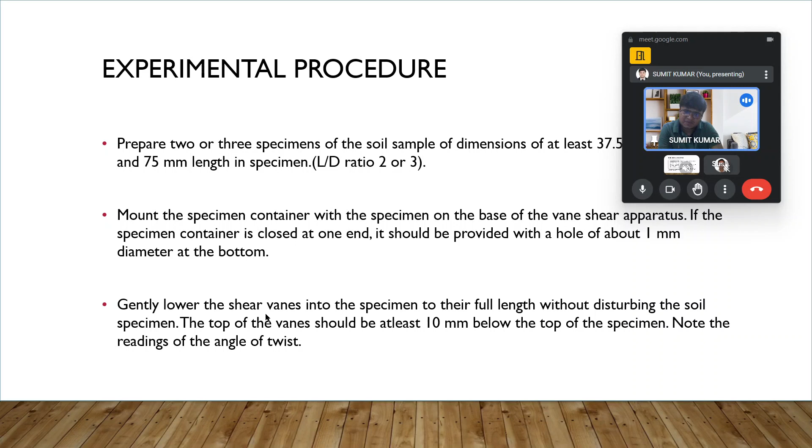The top of the vane should be at least 10 mm below the top of the specimen, and note the reading and angle of twist.

In the same way, when we provide rotation, it will be 0.1 degree per second rotation provided to give the torque, and apply the handle until the specimen fails, because afterwards we will be able to get the value of shear strength. So note the final reading of the angle of twist.

Find the value of blade height in cm and the value of blade width in cm, and afterwards you can calculate the value of shear strength as S equals T over pi d squared h by 2 plus d cubed, where T is the torque in cm-kg. You can convert the units to SI as well and find the result. Over there I have given it in the same way as discussed above, and with the help of that you will find the result.

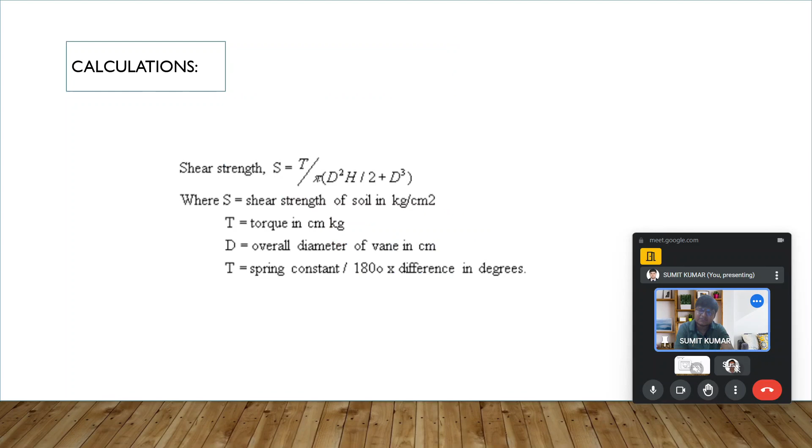Apart from that, the one way shear, two way shear, and some correlations are also there that will be implemented in the results before uploading the presentation for you.

So now we are calculating the shear strength, but we must have some aim behind calculating these factors. Our aim is to calculate the value of factor of safety. So how could we find the factor of safety?

We find the value of the peak. Basically, we are rotating, and at a certain point the specimen will get failed. So the peak is that value, and afterward, whatever factor of safety we want to apply.

Suppose 300 is the peak value, just taking units for example - this is not a practical implementation of how much strength will be there, just an example. So if we want a factor of safety of 3, we apply only 100 units of load. We say that we apply only 100 units of load, so it will be safe 3 times, because it can sustain 300 units of load, but we are applying only 100 units.

So in any adverse condition, such as during cyclic loading like dynamic loading or earthquake loading, our structure will remain stable at that place without affecting the structures situated there. So those aspects we are calculating. The factor of safety will be specified by us on the basis of the importance of the structure - if the structure is important for us, we will take that into consideration.

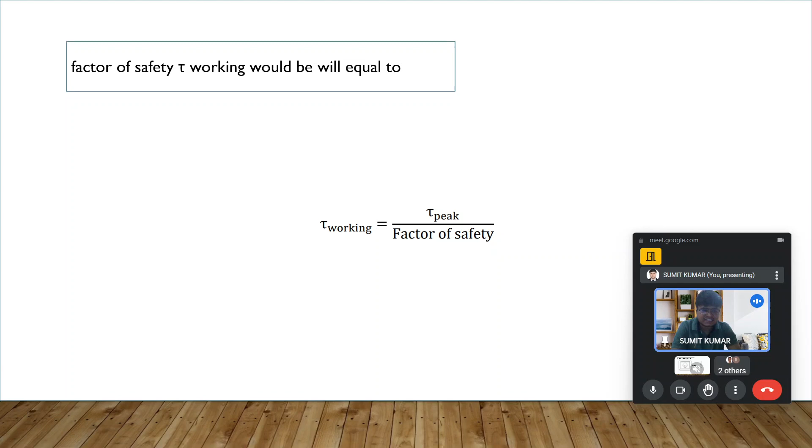Now, what are the advantages? Some advantage must be there for the vane shear test. If we are performing this vane shear test, some advantage should be there - otherwise why would we perform this test when we already have the direct shear test and triaxial test? It is said that it gives an intermediate result between the 2D plane strain condition and the 3D triaxial condition.

Now the sensitivity parameter, we talk about sensitivity. I already explained it is the ratio of undisturbed shear strength to the remolded shear strength. So this soil is classified also on the basis of sensitivity, that is, how sensitive it is.

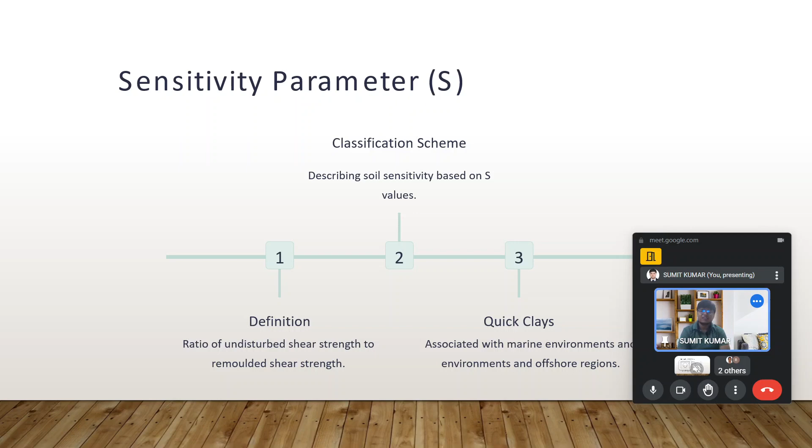There is a table in geotechnical engineering which says that after that, this soil is more sensitive for collapse. And when you talk about quick clay, it is associated with the marine environment, in offshore regions this type of condition gets developed in a soil. I will explain those things in coming classes.

Today, just the terms need to be understood by you.

So what is the importance of infrastructure development? When you talk about infrastructure development, we talked about the offshore environment. Here we implement it. Now we come to the importance of infrastructure development. In offshore development too, we want to develop structures, and because India is a growing economy, we want to develop every part of the country, not only the plain region, but at different places.

As we talked earlier about geotechnical engineering, we could construct slopes, stabilize different slopes and dams. We could construct some of the construction on hilly terrain, and those aspects need to be explored. So it is very important, this value or calculation of the shear strength, understanding of the shear strength of soil will help us in that regard.

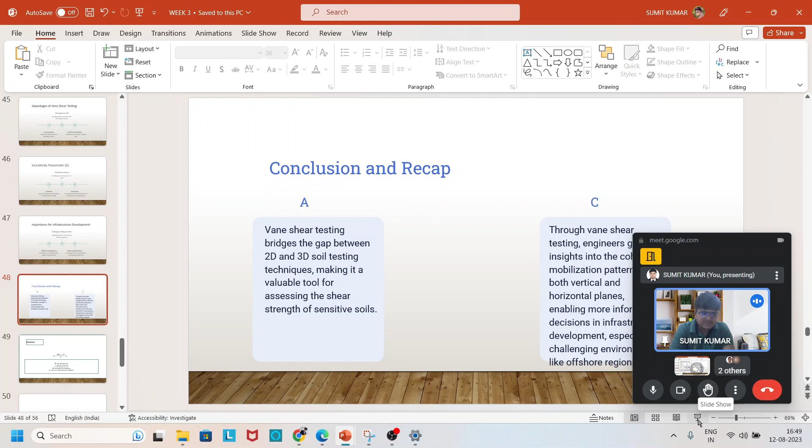So the vane shear test is a bridge gap between the 2D and 3D soil testing. Specifically, it is mentioned that the plane strain and the triaxial test act as a bridge between them, and a valuable tool for assessing the shear strength of sensitive soil.

It is also important that at some places where we are not able to find the value of shear strength, we are not able to perform tests like the direct shear and the triaxial test over there. Also, the vane shear test could be performed with ease, and we get results that will help us in stating the strength of the soil at that location.

Moving ahead, the second point is that through a vane shear test, the engineer gains insights into the cohesion mobilization pattern, both vertical and horizontal plane. These are discussed enabling more informed decisions in infrastructure development, especially in challenging environments like offshore regions. So those aspects are taken into account.

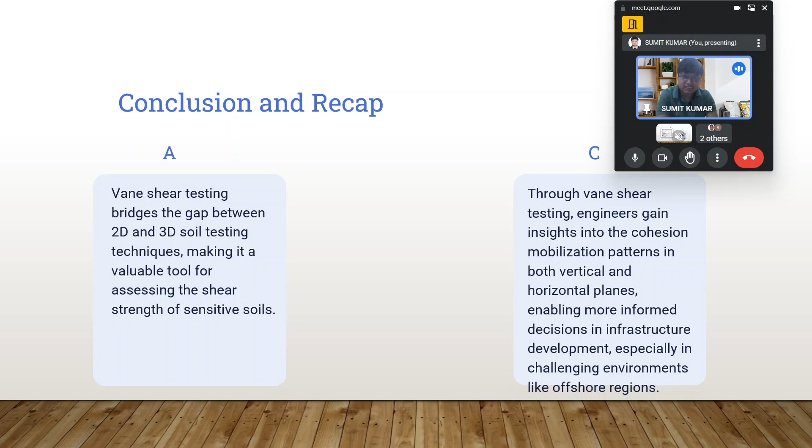One thing you must understand is that we are going to solve some very good problems based on this in subsequent classes. There, you will get the idea of how the application of load and the dimension of foundation will ultimately help us. Moving ahead, I will state some of the challenges which we came across during shear strength.

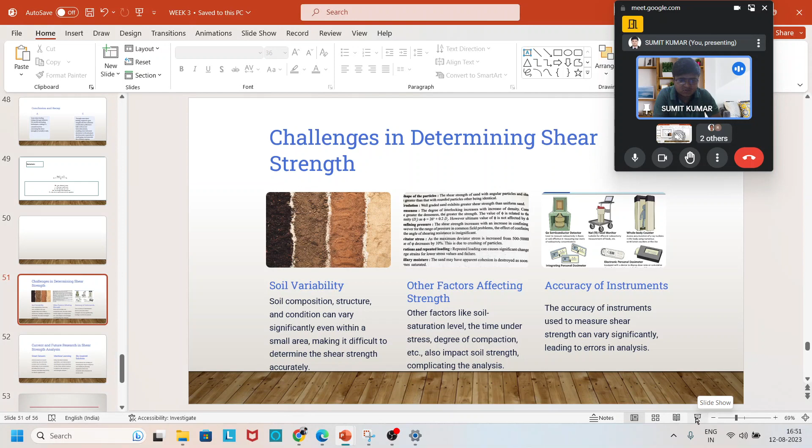So some of the challenges are soil variability. Specifically, it has been seen that soil gets varied at different places, with different soil properties. The compaction energy also gets different when we go to different places, different environmental conditions, different soil types, different plains, and different sections like plain, slopy region, hilly region, or mountainous region. So different soil properties are there, and different tests need to be performed at different places to find the shear strength accurately at those locations.

Some other factors like soil saturation level and the time under stress - some points are there where the stress is applied for a very long time. These aspects also need to be understood as they impact the soil strength, complicating the analysis and accuracy for instruments. We are performing different tests like direct shear test and triaxial test, but the instruments we use, the methods we perform those tests with, and the results we get from them are equally valuable, because on the basis of those results only we state that this type of soil has this much strength. So those need to be understood and considered well before stating any strength.

Some correlations are there. Now we talk about some of the current and future research scope of strength analysis. I am not saying we are closing the topic, but for today I have decided to close here. So I have added some of the future research which we could perform in this field, like advanced smart sensors - advancement in sensor technology allows more accurate and continuous monitoring of soil conditions, providing new data for analysis and improving safety in various applications.

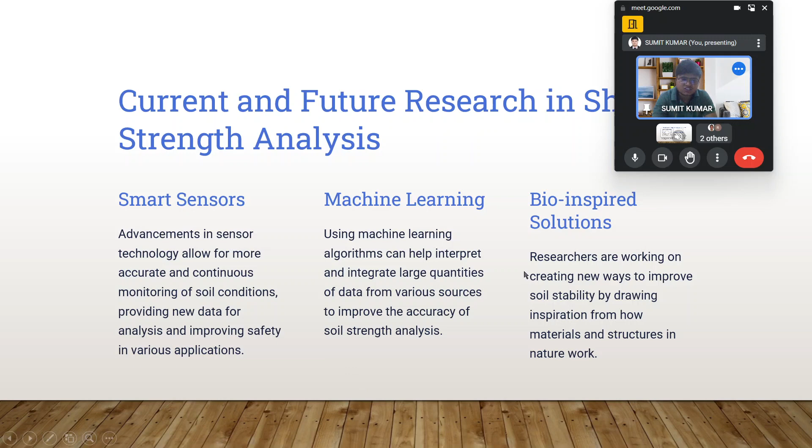Machine learning - using machine learning algorithms can help interpret and integrate large quantities of data from various sources to improve the accuracy of soil strength analysis. Apart from that, bio-inspired solutions - when we talk about bio-inspired solutions, researchers are working on creating new ways to improve soil stability by drawing inspiration from how materials and structures in nature work.

So this is the future aspect. You need not worry up to that extent about this. This is just something I wanted to share with you that will help you understand the topic.

So again, one question remains fixed from the first class only: what is shear strength? So the basic aspects of shear strength - whenever I give this question, try to write this question on your own. If you are able to write these problems, it will give you deep understanding of the topic, like what is shear strength, and give the practical implementation of why the soil fails at certain sections only and why it doesn't fail from other points, irrespective of what we are implementing - that soil fails from this section only. So those aspects need to be understood by you.

So when we talk about shear strength, there are definitions of shear strength given in different terms. Try to write by your own, and afterwards also try to find the different terminology when we talk about shear strength, defining the same shear strength in different ways. It will enhance your understanding and writing capability in that regard as well.

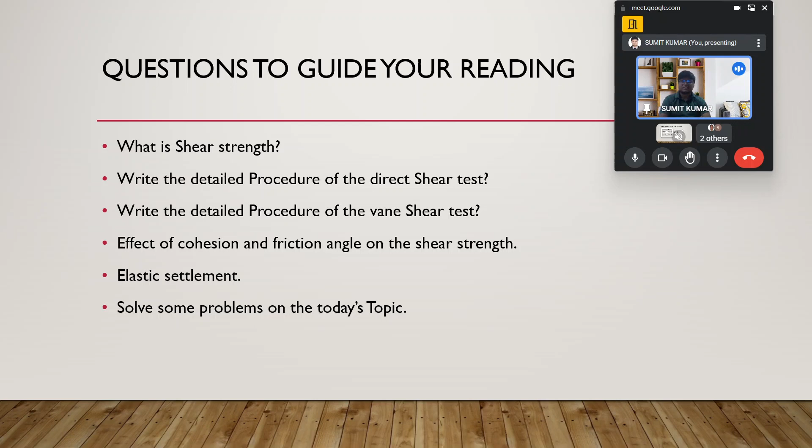When there is no compulsion, everyone wants to skip it and just do the assignment, but don't do that. It will increase your understanding of the subject, and when you go for the exam, this will help you more than just solving simple problems like MCQs.

Those MCQ questions will still need to be solved, but please also go through some of the problems from the several references on the NPTEL site. Solve the problems from those books. Whatever problems I have discussed, similar problems are there, and more aspects of problems may be there.